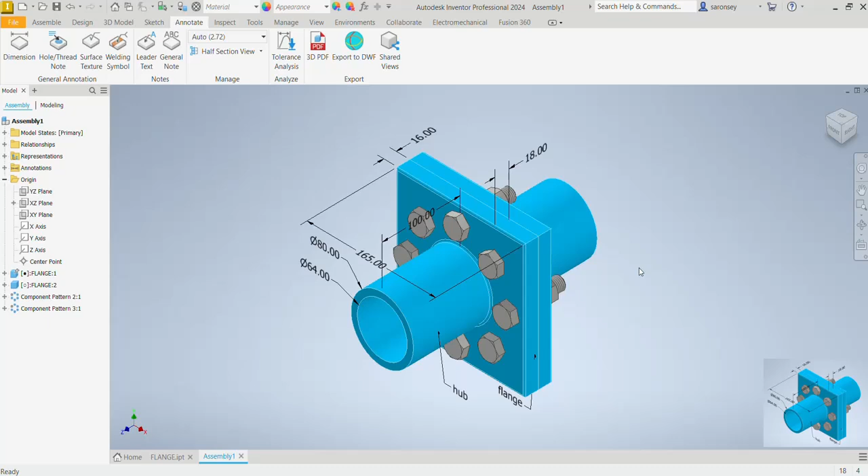Today's exercise is going to be on this flange coupling. The dimensions are specified in what you see. We would also be exploring the Content Center in Autodesk Inventor. Let's start. Let's begin with our sketch.

Ctrl plus N. Under Part, create 2D and 3D object. Select Standard mm.ipt and create. We'll begin with the flange itself. Click on 2D sketch and work on the XY plane. Come up under rectangle, choose the 2-point center rectangle, and with this origin, draw a rectangle.

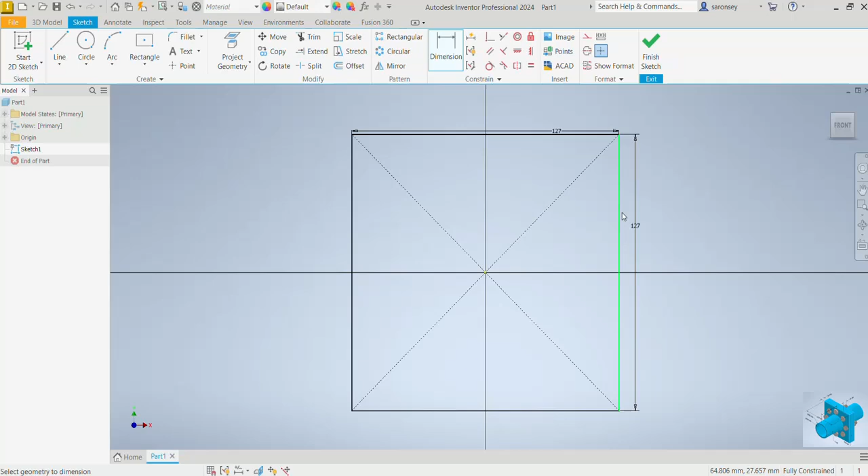Click on the dimension command and let's dimension it. The length of this rectangle is 127 and the height is also 127. Finish the sketch. Let's zoom in and extrude this profile. Use the extrude command, and extrude to a distance of 18 mm.

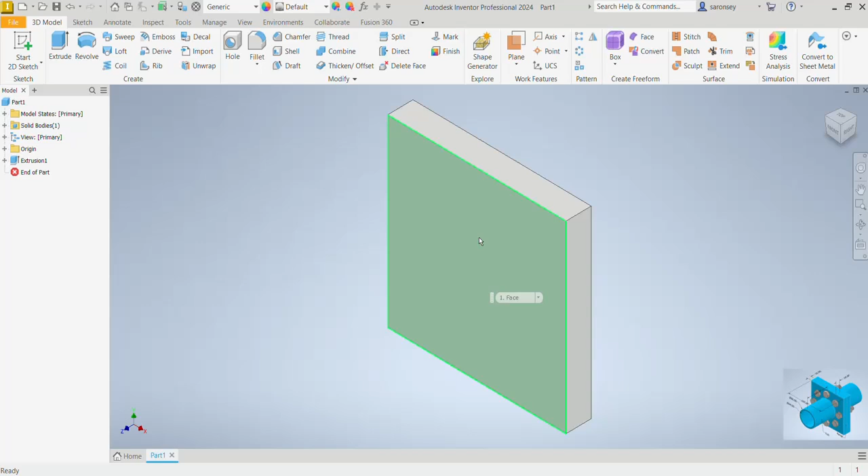Now we'll make the hub. The hub is the pipe-like body that rests on the flange. Select this face, create sketch, and choose the circle command. With this origin, draw a circle of diameter 80 mm. Enter, right click, then OK.

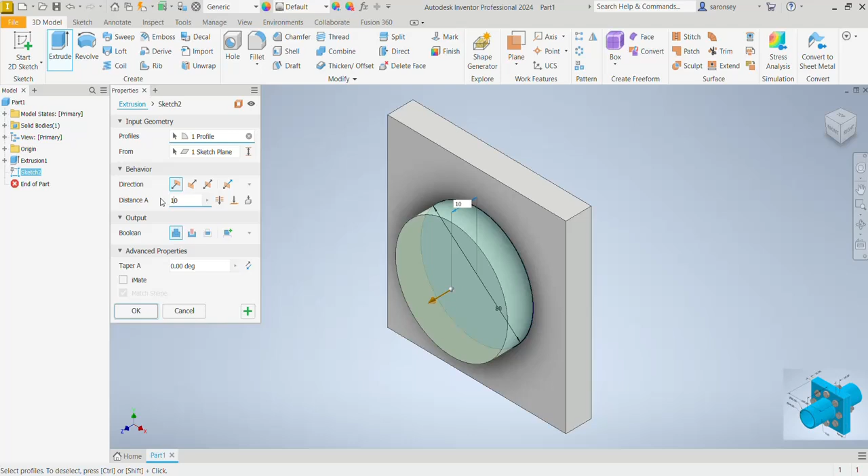Finish the sketch and extrude the profile we just drew. Use the extrude command, the profile is correctly selected. Extrude to a distance of 100 mm and press OK.

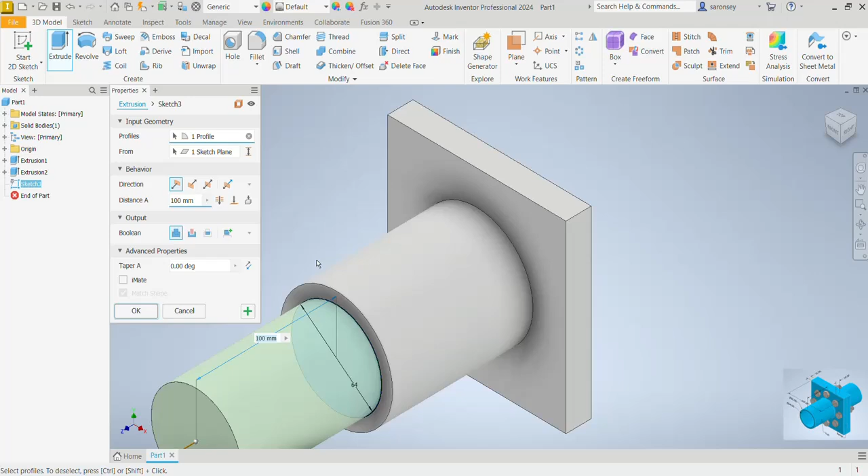Now let's create the pipe. On this face again, sketch, choose the circle command and draw a circle of diameter 64 mm. Finish the sketch and extrude the profile. Click on the extrude command and choose extrude cut, not extrude join.

Choose the extrude cut command and extrude through all, meaning we want the hole to go all the way through the flange. Select the through all option and press OK.

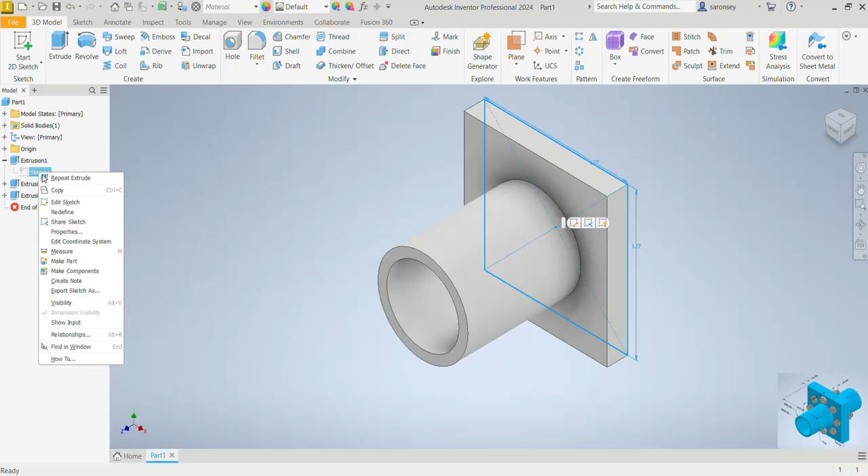We need to make some corrections here. This is a good opportunity to learn how to edit our sketch from the beginning. Let's open the very first sketch we made. Under the extrusion, click the plus sign, right click on this sketch, and select edit sketch. The length of this profile is rather 165 and the width is also 165. Enter. Now we can finish our sketch and our body has been updated.

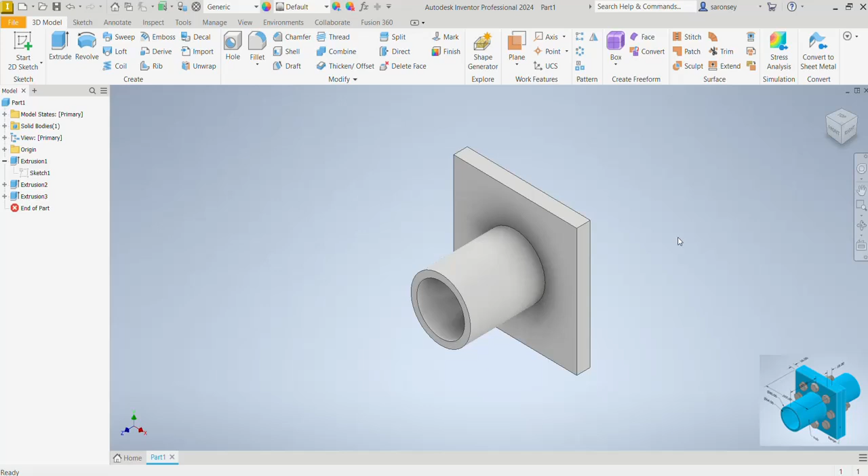Let's go ahead and make those holes for the bolts. Turn our work down, choose this face and then sketch. Choose the line command and make it constructional. Draw a constructional line from the origin up. The length of this line is going to be 63.5.

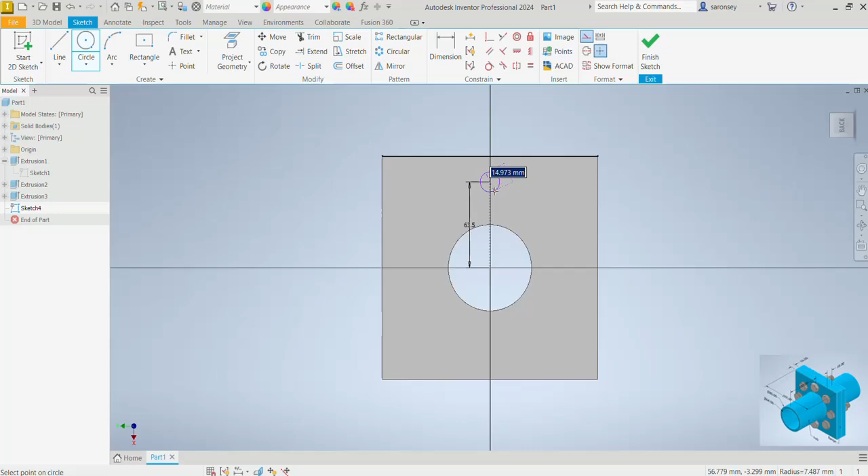Enter. Right click. OK. Now choose the circle command and draw a circle from where the line ended. The diameter of this circle is going to be 16 mm. Right click. OK. But this circle is not constructional, so let's change it to solid lines. Select this profile and turn off the construction.

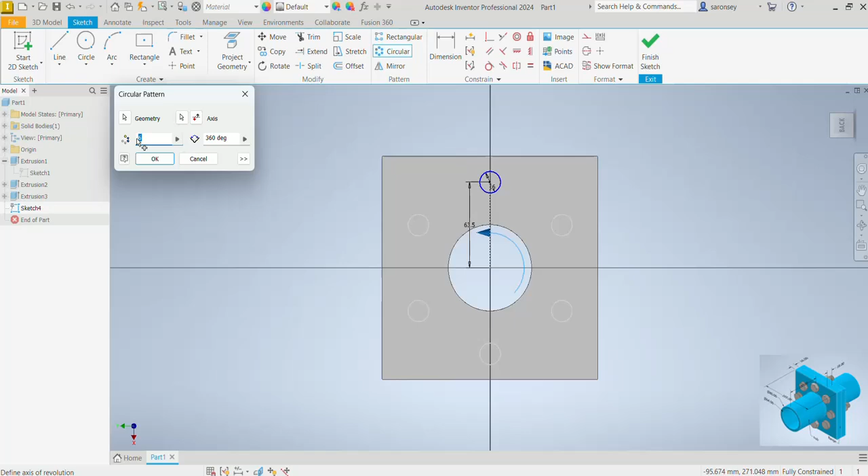Now let's pattern this circle around this face. Choose the circular pattern command and select the geometry we want to pattern, which is this one, and then the axis we want to pattern around. We can use this origin and straight away we see a preview, but we want 8 instead of 6 holes. Change that from 6 to 8 and press OK. Now go ahead and finish the sketch.

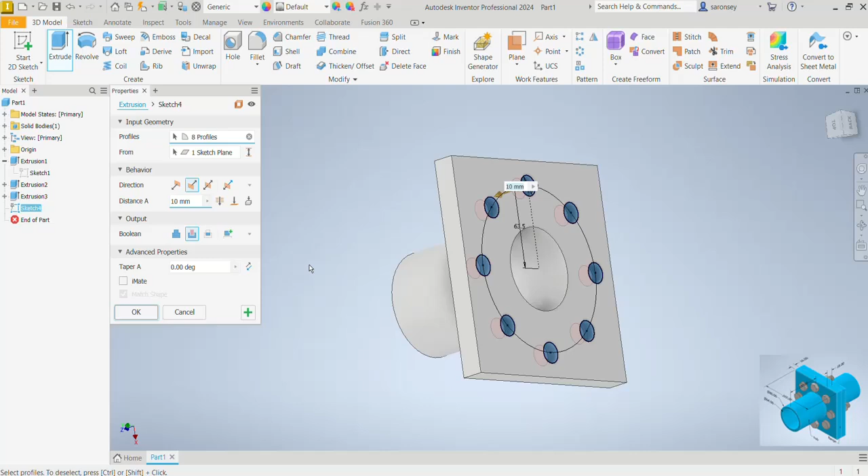Click on the extrude command and choose these profiles to create the holes, all 8 of them. We are removing material, so it's supposed to be extrude cut. We want to cut up to this back surface, so we'll choose To and select this face. Now we press OK.

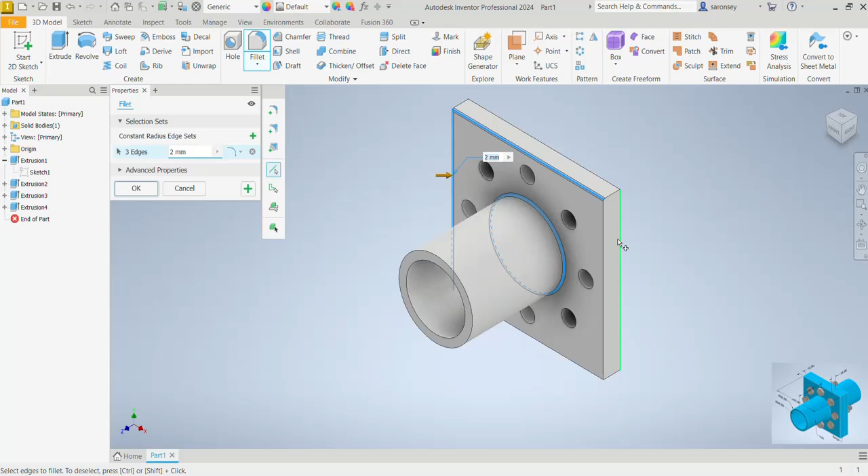Let's go ahead and apply some fillets and we'll be done. Choose the fillet option and apply the fillet to this face and the edges of the flange. Press OK. We'll go ahead and save this file and assemble. Save. This is the flange.

Now let's go ahead and assemble. Create new and then under assembly, assemble 2D and 3D components. Select standard mm.iam and create. We get a new worksheet.

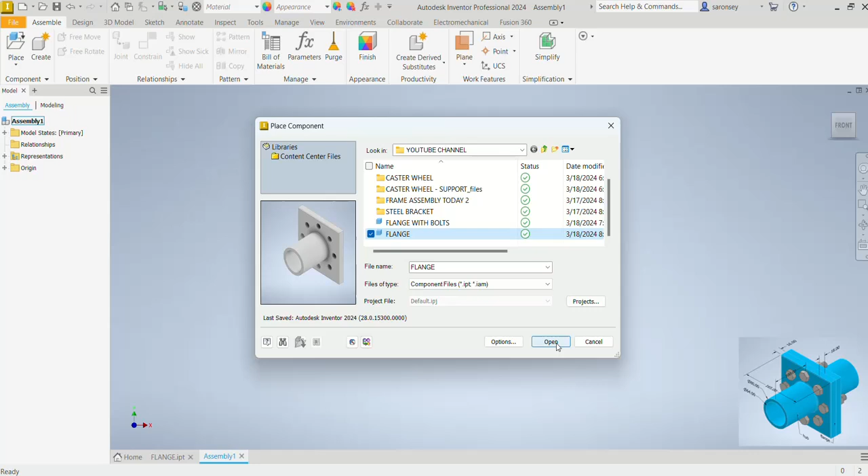Now let's bring in the flange we just created. Use the place option and select the body we want to bring in, which is the flange, then open. Now let's place the flange here. We'll place the first one and then place a second one also, but we want to turn it so that the flanges are facing each other.

Right click and choose rotate 90, then right click again and rotate 90 so we have them facing each other. Click to place the body, right click, then OK. Now let's change the view. Under the view tab, under visual style, choose shaded with edges so we get the edges.

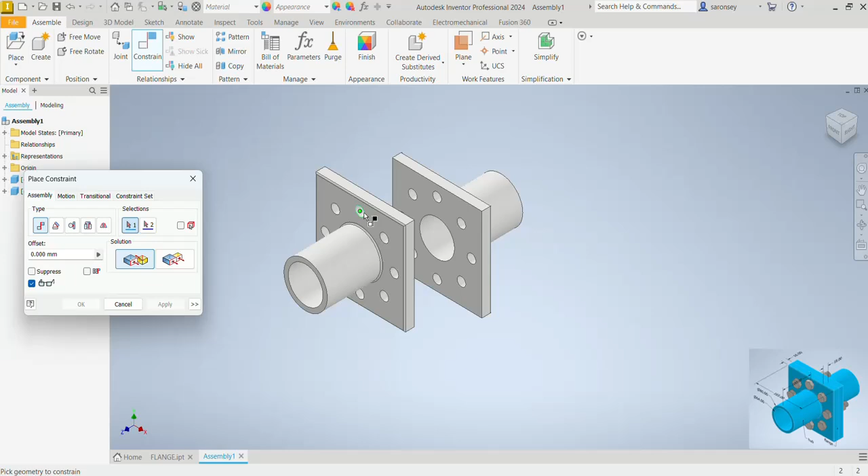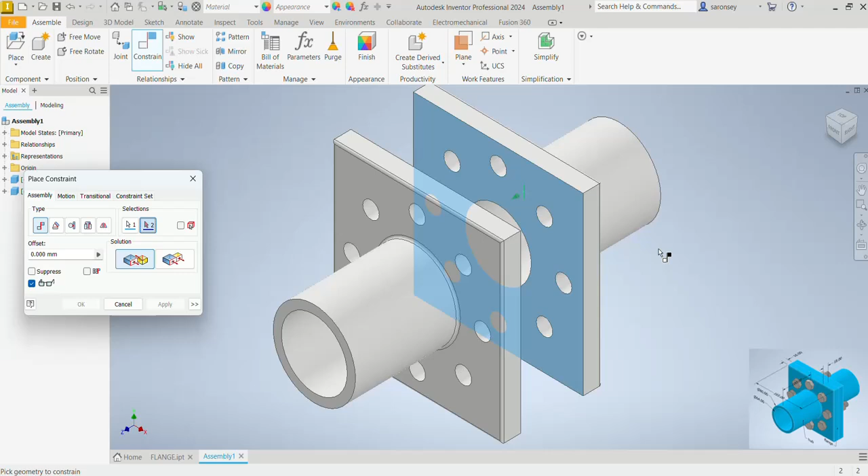Now let's constrain. We'll first constrain the 16mm holes. Choose the constrain option under the relationship group and select this circle and the corresponding one on the other flange. We can apply. Let's bring this backwards and drag it open. Choose the constrain command again and now we'll constrain this face, turn it, and then that face. Apply.

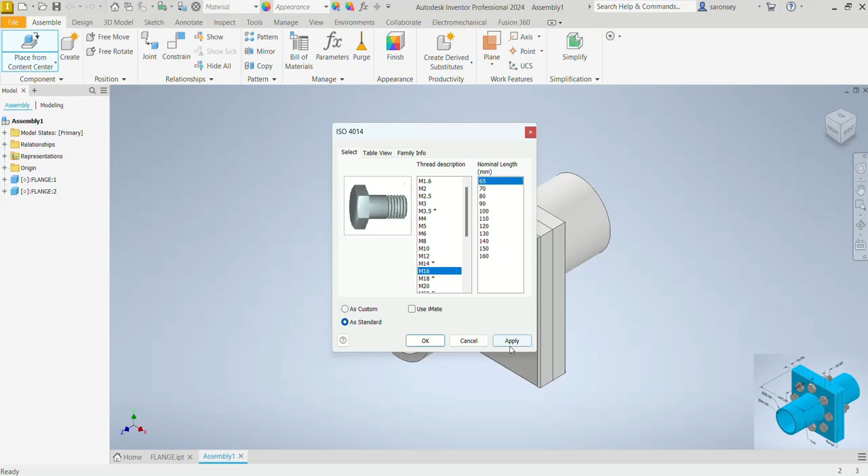Now we can place, but let's specify some details here. We are going to choose M16 because our hole diameter is 16, and select the nominal length of 65, and apply. Let's right click to rotate this in the Y axis and then place. Right click again and then OK.

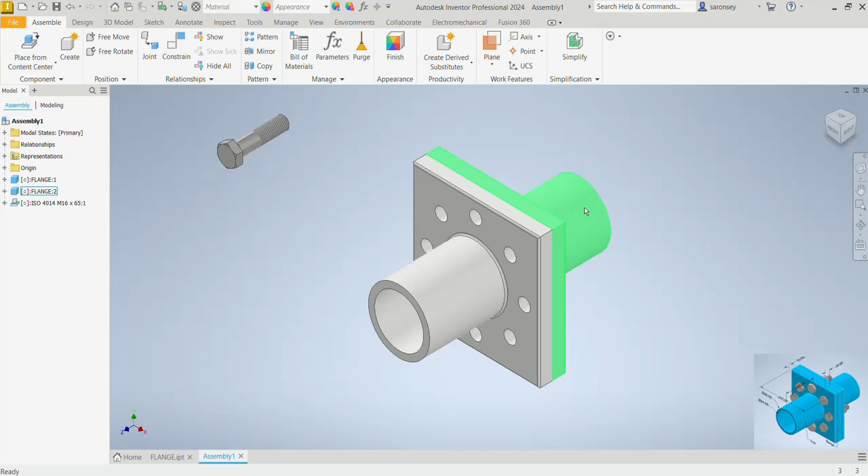Let's close this dialog box, and close this one also. Great. But we didn't ground any of these pieces. So let's choose this one, right click on it, and select the grounded option.

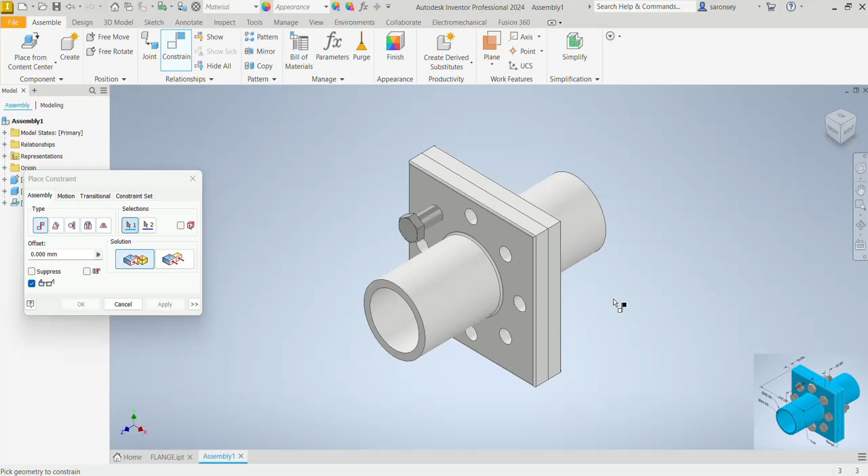Great. Now let's constrain this bolt. Choose the constrain command and then let's constrain this axis and then the axis of our through hole. We can apply. Now let's turn this and also constrain this face, turn this body and then that face also. We can apply. Close this dialog box for now.

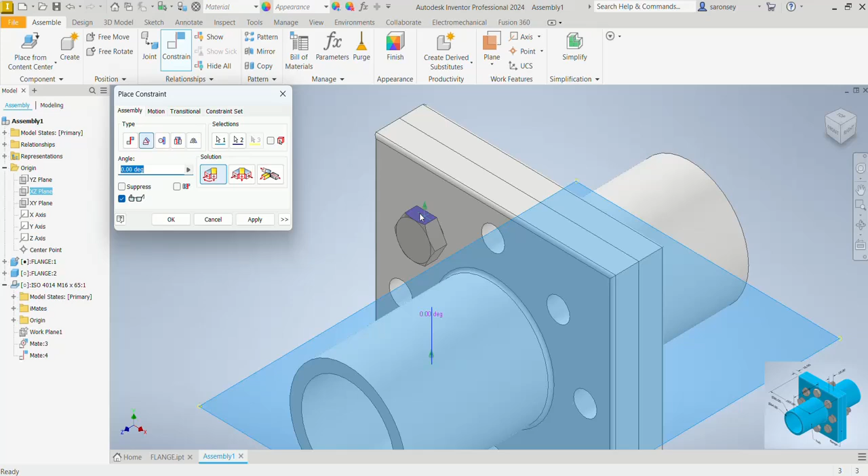Awesome. So notice that this bolt is rotating. Let's apply one final constraint to stop that. Click on the constrain command, move this out of our way, and choose the XZ plane. Now select the angle type and also the directed angle, and select this face. Click on apply and close this dialog box. Now we've stopped this from rotating.

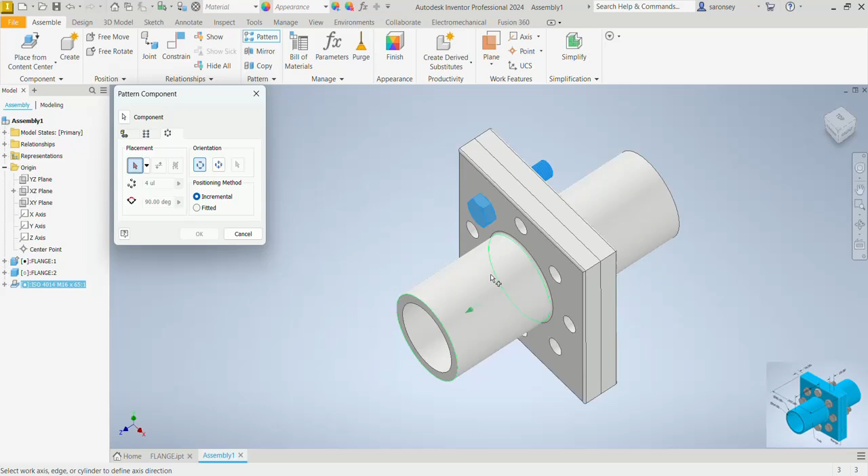Now let's pattern this bolt inside the other holes. Click on the pattern option here and choose the circular pattern. Let's select the component we want to pattern, which is this bolt, and then the axis we want to pattern around - we can choose this axis. Now how many instances, how many bolts we want - we want 8 of them, and change this angle to 45, so at every 45-degree angle we want a bolt. Press OK. There we go.

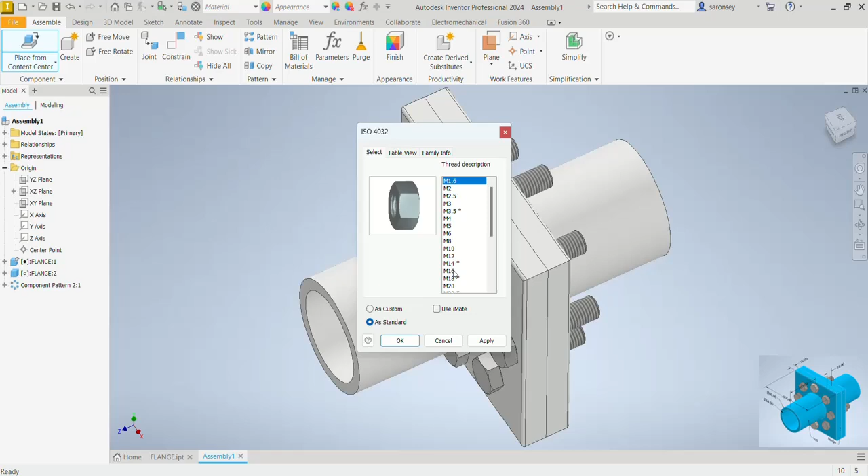We'll do the same thing for the nut. Place from content center. Let's open up the nut and select hex nut. We'll choose the first one, ISO 4032, and then OK. We'll place here by clicking in our workspace and specify the thread description - we want M16. We'll click on apply. Now let's place anywhere here in our workspace. Right click, OK. Let's close this dialog box and that as well.

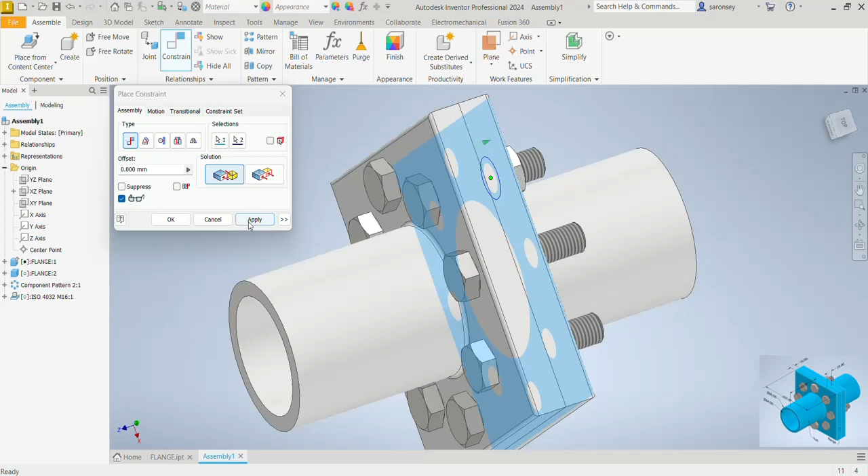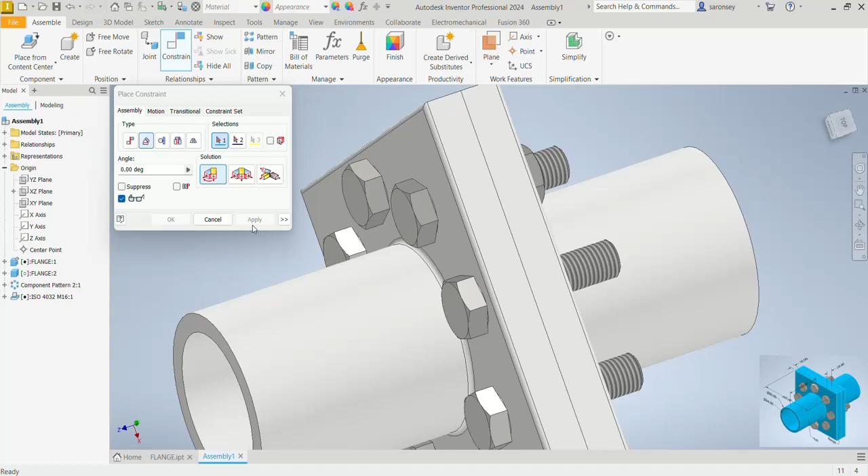Now let's apply some constraint. So the constraint option, let's choose this axis of the nut and then the axis of the bolt. We can apply. Let's apply some mating constraints also, so we'll select this face and then zoom in that face of the nut and constrain. Apply again. Now we want to align this face and then that face of the head of the bolt. To do that, let's choose type angle and select the first option, which is the directed angle, and now we'll choose those two faces, this face and that face, and click on apply. You can close this dialog box.

We can also pattern this nut all around. Choose the pattern command, same process, click on circular pattern, and the component to pattern will be this one. The axis, we can choose this axis, and then the instances we want 8 of them. We can also change the angle to 45 and OK.

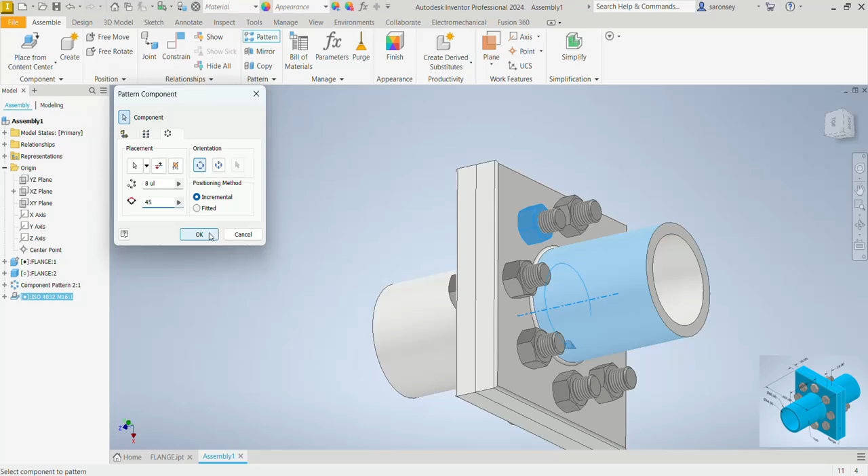Let's finish this off by changing the appearance. Select the first flange from the model tree, hold down the control key and select the other one. Now drop down this option and let's choose sky blue medium, or any color of your choice. There we go.